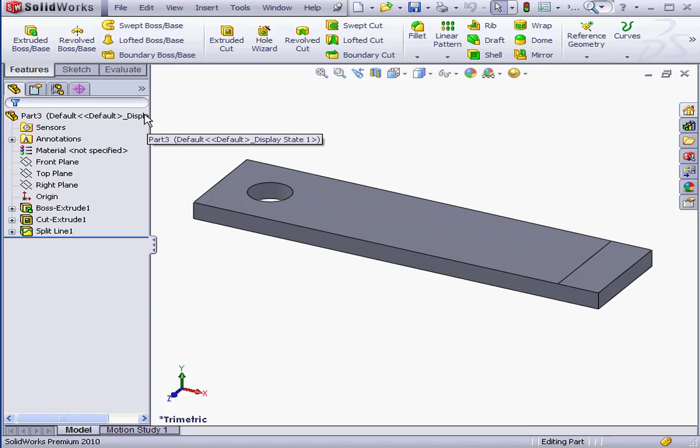Let's go to the Evaluate tab, and from here we'll activate SimulationXpress. SimulationXpress Analysis Wizard. Let's click Next at the bottom of the wizard page. In my graphic area, I've got a steel plate. The left side will be bolted down with this cut extrude over here. On the right side, I've applied a split line tool. This is the face where I'm going to be applying some load. Notice in the SimulationXpress study tree, we've got 3 items: Part 3, Fixtures, and External Loads.

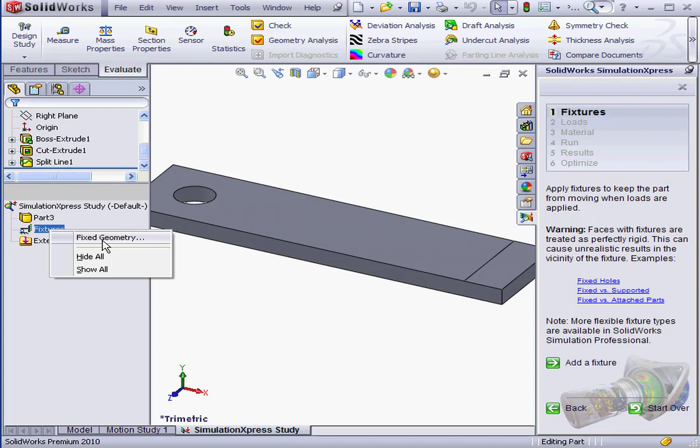The first thing we're prompted to do in the wizard is to add a fixture. Let's click Add a Fixture. Or we can right-click on Fixture in the tree and select Fixed Geometry. I'm going to select this face, and this restricts the face in space from any movement. We can select more than one face if needed. For now, I'm going to click OK. And Fixed-1 is now a fixture in our study tree. To edit this fixture, simply right-click on it and select Edit Definition.

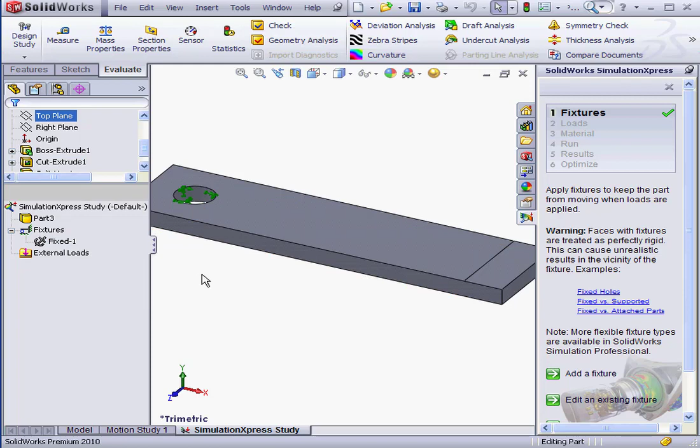Adding another fixture is easy. We can simply return to the wizard and click on the green arrow, Add a Fixture. The Fixture Property Manager opens. Let's cancel out of it for now. Now I'm going to click Next in the wizard. On this page of the wizard, we choose whether to add a force or a pressure. We can do the same thing from the study tree. Right-click, select Force or Pressure.

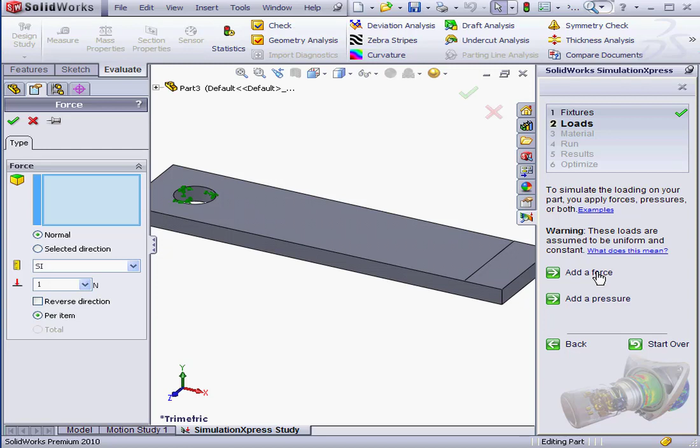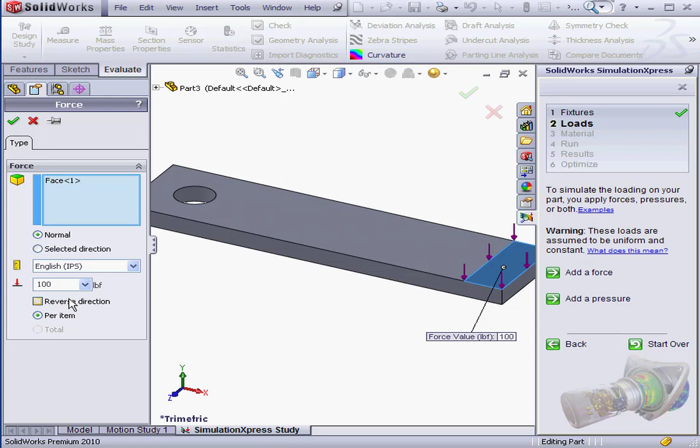I'm going to add a force. Now I'll select this face. Next, we have the option to apply the force normal to the face or from a selected direction. Let's apply it normal to the face. Let's change the unit of measurement to the English system: inches, pounds, and seconds. Force value, I'm going to apply 100 pounds. I can check this box to reverse the direction if needed. If we selected more than one face, we can specify whether the load will apply per face or in total. I'm going to click OK now. And Force-1 has been added to our tree. Let's click Next in the wizard.

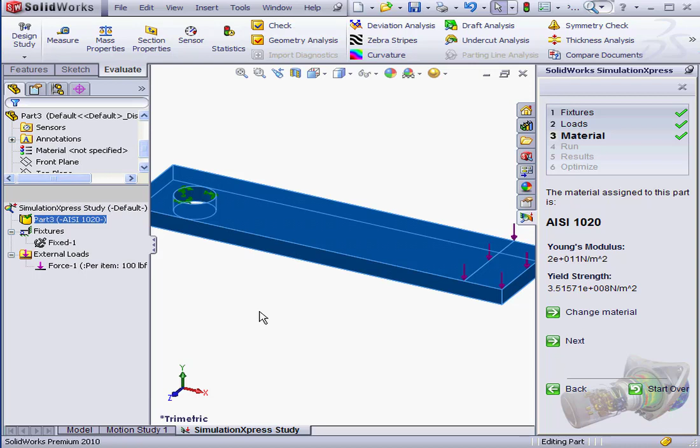Once again, we can click here, choose Material, or we can right-click on the part in the study tree, Apply/Edit Material. I'm going to use AISI 1020 steel. Apply and close. The study tree displays our material applied to Part 3. Notice that the part doesn't display this material selection in the FeatureManager tree above. Basically, the material we use in a study is distinct from the material we select for the actual part in SOLIDWORKS. Let's click Next in the wizard.

Now we're going to click Run Simulation. And we see how the part deforms under a 100-pound load. Up in the top left corner of the graphic area, we see that the deformation scale is about 26. In other words, the part deforms 26 times greater here than in reality. Let's stop the animation by clicking on the Stop button in the wizard. Does the part deform as you expected? If so, we'd click Yes and then Continue. If no, we could return to the Loads and Fixtures wizard pages. Let's click Yes.

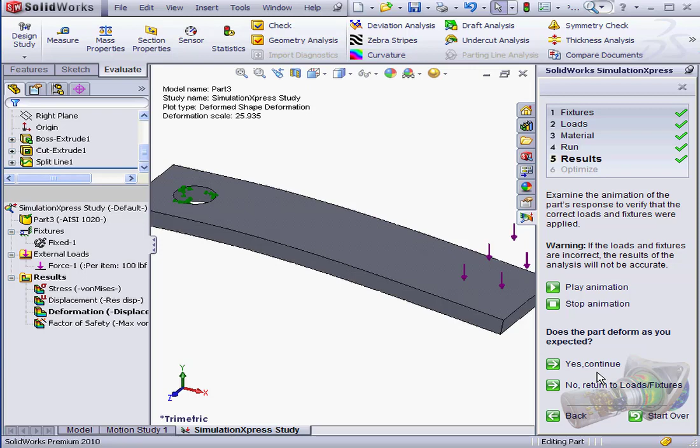On this page of the wizard, we can review a variety of results: von Mises stress, show displacement. The same items are available here as well on the study tree. Let's double-click on the von Mises stress distribution item in the study tree. A colored stress distribution displays in our graphic area.

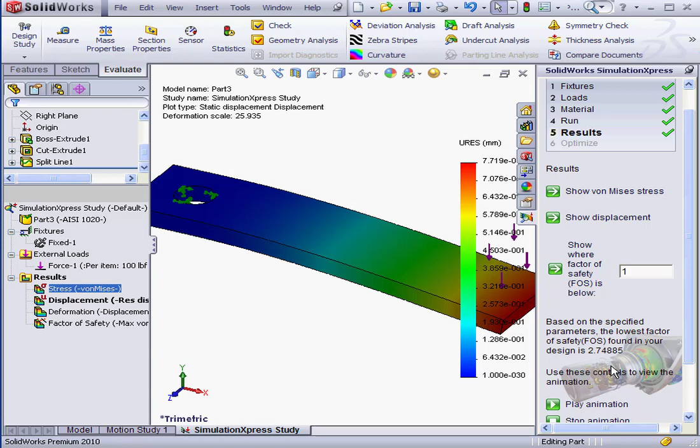The next criteria we have here is the factor of safety, FOS. In our case, the factor of safety is 2.7. In other words, the part can hold 2.7 times more load before it starts yielding. Let's say we want the factor of safety to be 4, or that we want the part to hold 4 times more load before it yields. Let's enter 4 here, and then click Show.

Here in red is the area where the factor of safety is below 4, and that's the area I want to strengthen if I need my part to be able to hold 4 times or more load before it yields. Let's check 6 now, and then click Show where factor of safety is below. As you can see, it's a significantly larger area. The area in blue is where the factor of safety is greater than 6.

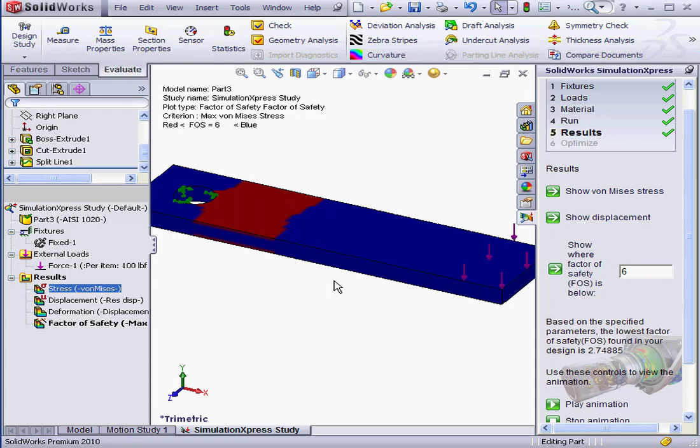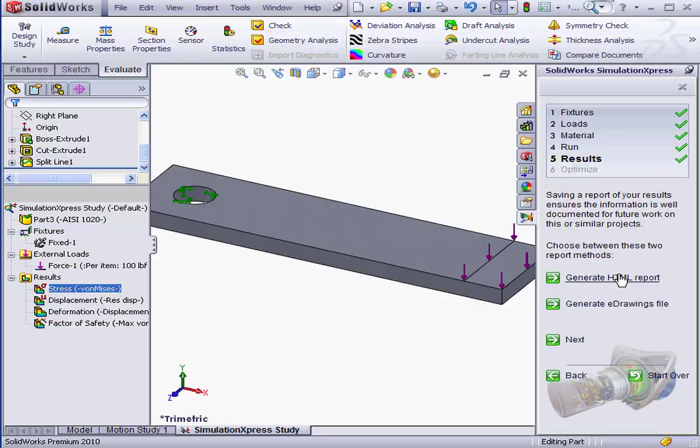Okay, we're ready to move along now. Let's click Done Viewing Results. And here we can view our results in an HTML format or generate an eDrawings file. We'll be looking at how to generate an eDrawings file in this course. For now, I'm going to opt to generate an HTML report. And here we've got an HTML report containing file information, material, load, study property, and so on. Let's close the report and click Next in the wizard.

The last option is to optimize. Let's say we want the factor of safety to be 4 for our part, but currently it's set at 2.7. SOLIDWORKS will let us adjust a single dimension to meet this criteria. Would we like to optimize our model? Yes, we do want to optimize the model. So let's click on Next.

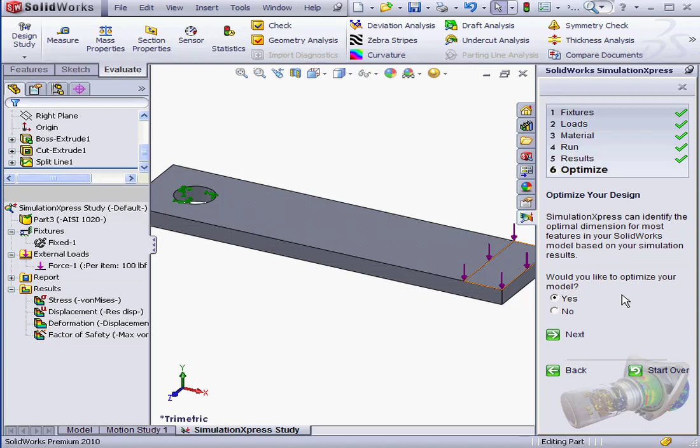The first thing to do is select a model dimension to use in the optimization. We'll select it right from the graphic area. I'm going to use the thickness dimension of 10 millimeters and click OK. Next, we need to specify the minimum and maximum range. Let's say 10 will be our minimum, and for our maximum, 20.

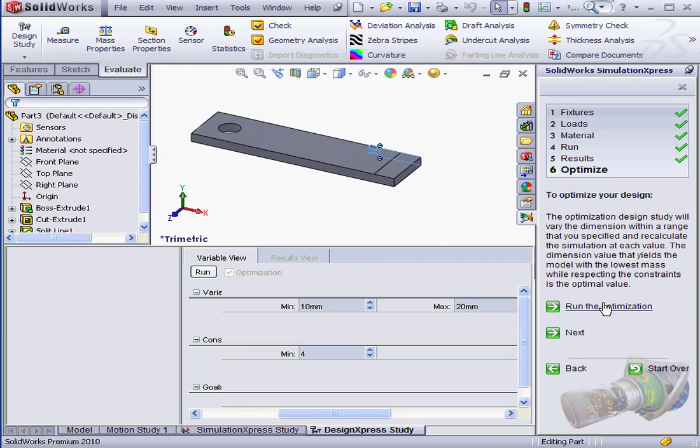Under Constraints, we can select the parameters by which we'll be optimizing: factor of safety, maximum displacement, maximum stress. Let's use factor of safety. And the factor of safety I'd like to be greater than 4. Click Next. Next again, since we did edit the constraint already. And we're ready to run the optimization. We can simply click this link in the wizard, or we can click on the Run button over here.

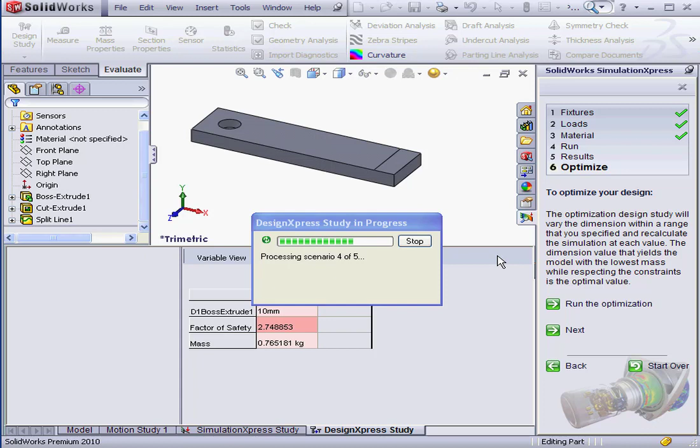Let's click Run Optimization. The study is in progress, processing scenarios 2 of 5, 3 of 5, 4 of 5. We can stop any time if we need to with the Stop button, and processing 5 of 5. The optimization process is now complete. Now we've got a factor of safety of 4.9 with an optimal dimension of 15 millimeters. The mass of our model is 1.16 kilograms.

The factor of safety is actually a little bit higher than we need, so let's edit that dimension. Edit Dimension. Let's cancel out of the Add Parameters window since I'll be using the same dimension. For the minimum, let's make it 12 instead. The maximum, let's say 15. And let's run the optimization again. Processing the scenarios. Four of 5. And 5 of 5.

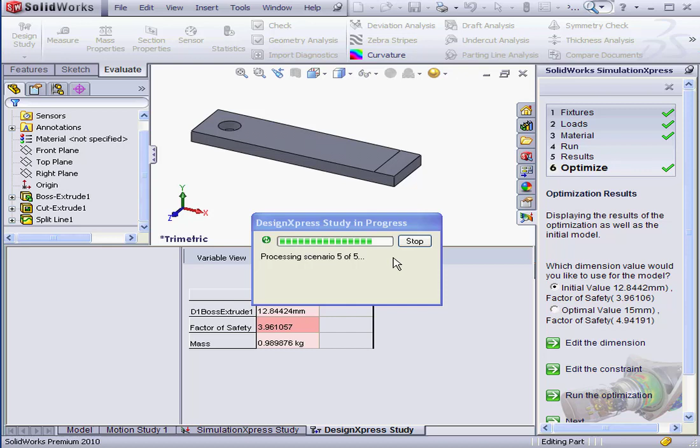Okay, the optimization is complete. Now we've got a more desirable result with the factor of safety at 4.009. The thickness of our part, 12.85 millimeters, and the mass just slightly below 1 kilogram. Let's stick with 12.8566 millimeters and click Next.

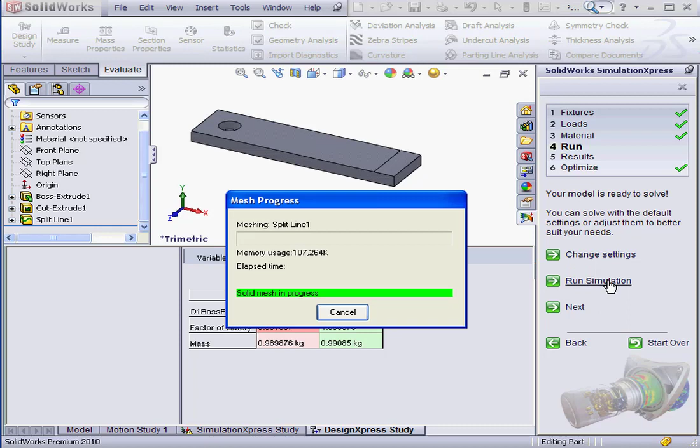And we have our results. They are out of date. We do have to update them, so let's go back to Run. Run Simulation. And we can generate a new report now. And this concludes our overview of SimulationXpress. In our next lesson, we're going to be picking up with an exercise where we put SimulationXpress to work.